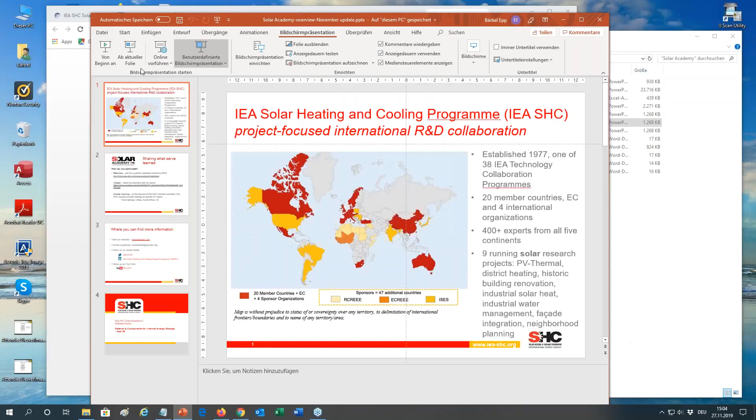Now, I think I want to show you some slides on the IEA Solar Heating and Cooling Program. If I get the, oh yes, that's it. I hope it's all visible.

Well, the IEA Solar Heating and Cooling Program, which is co-organizer of this webinar, is one of the very established and first IEA technology collaboration programs. We have about 20 country members, the European Commission, and 4 international organizations. That means that more than 400 experts from all 5 continents group, and they work in particular solar research-oriented projects. And I name some of these topics. This is a wide range. We work on PV thermal, district heating, historic buildings, industrial solar heat, industrial water management, facade integration, and neighborhood planning. And as we will hear today, about thermal storage material development.

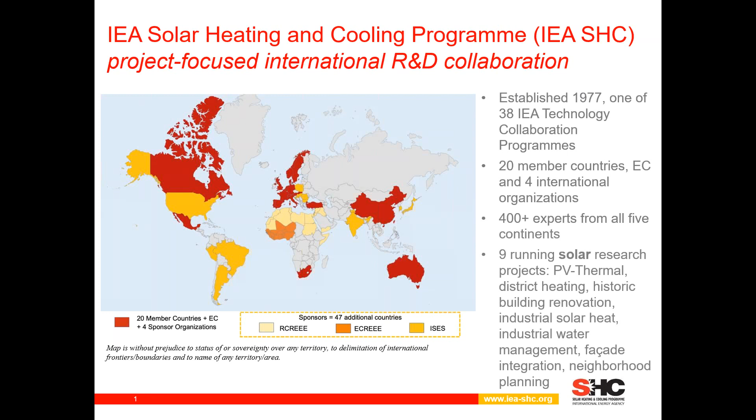We have a webinar today, as I already said, and Jenny said as well, material and components for thermal energy storage. Actually, Task is the word for an international research project within the IEA Solar Heating and Cooling Program.

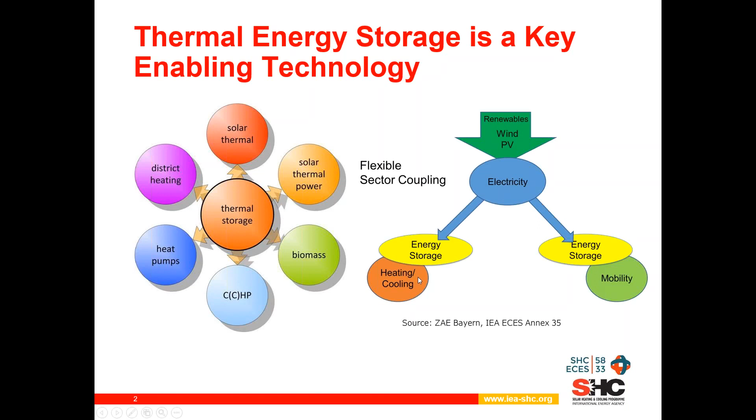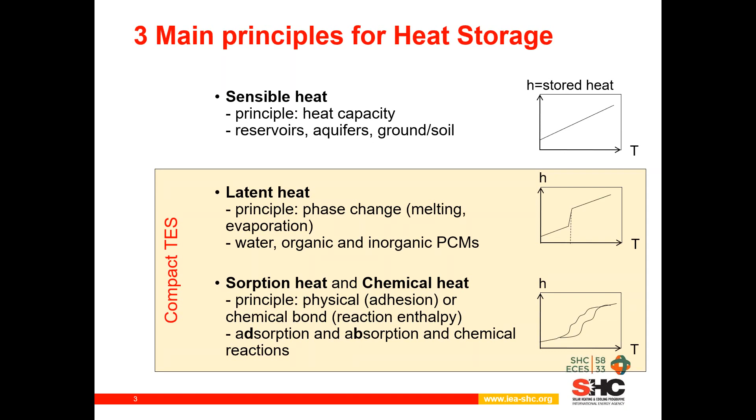In general, these two last classes are being treated and studied in Task 58 Annex 33. We call them the compact thermal energy storage.

What is the purpose of having compact thermal energy storage? The first is that it has a higher storage capacity, meaning you need less volume to store the same amount of heat. This is very important in those areas where volume is very costly.

Another quality, especially for thermochemical materials, is that the losses are minimal, meaning heat can be stored for long periods without virtual losses. This makes them especially attractive for long-term storage.

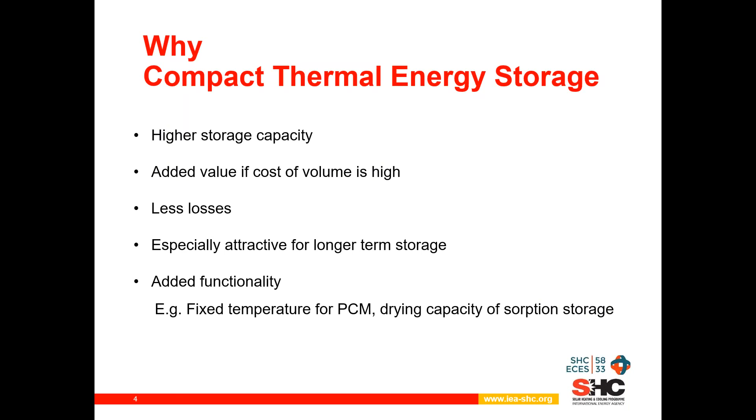Another reason for using compact thermal energy storage is that the materials could have an added functionality. For phase change material, the added functionality is that most of the heat is stored at a certain fixed temperature, meaning those materials can also be used for comfort heating or comfort cooling. For sorption material, moisture is taken up by the material, leading to an added drying functionality.

The challenges in general for thermal energy storage is that it is dependent on the application, meaning that the temperatures at charging and discharging determine which material can be used in which application, next to the charging and discharging powers, for instance. The challenge, therefore, is that there is no direct relation between the material properties, the material data, and how this material will perform in a given application.

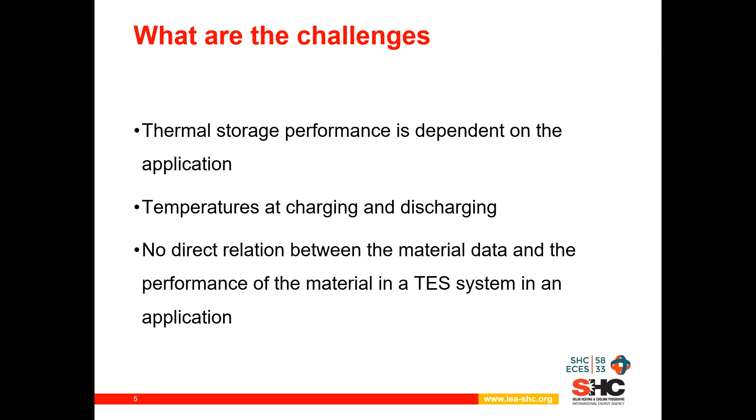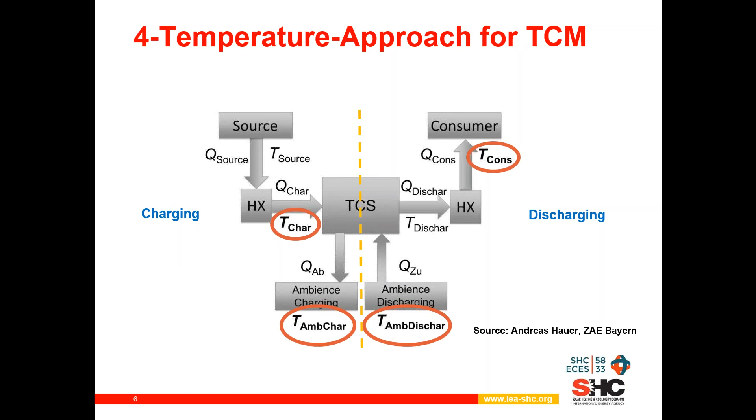But we need another cycle that goes in the other direction: first calculating what the system performance is for this component and material, then going back to the component to see what we can improve. Then we have a component performance, and from this, going back to the material to see if we can change it for a better performing component. This cycle needs to be gone through several times in order to have an optimized system for a given material and component.

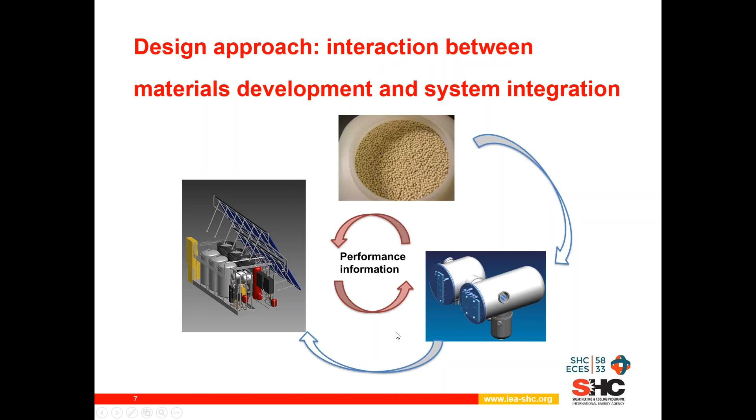And that is what we do in this task. The task is an international collaboration within the International Energy Agency. It's Task 58 because this task is coming from the program Solar Heating and Cooling, and it's Annex 33 because it's coming from the program of energy conservation through energy storage.

We have a 3-year working time, started in 2017 and ending this year. The typical working is that there's a gathering of experts every half year, and these experts are both from the material side and from the application side. So we have a good collaboration between the materials experts and the people knowing how to integrate a storage in a certain application.

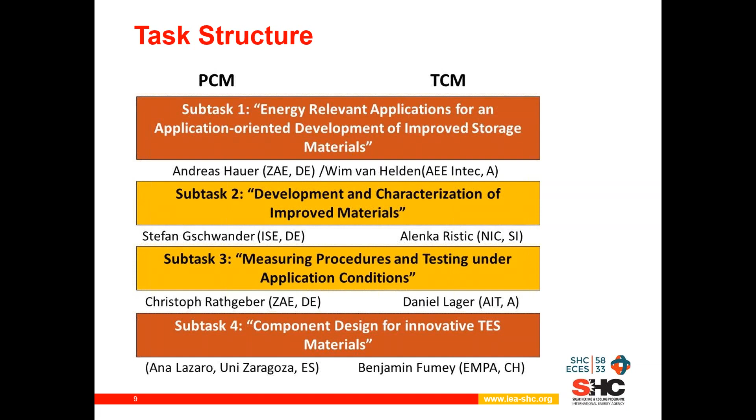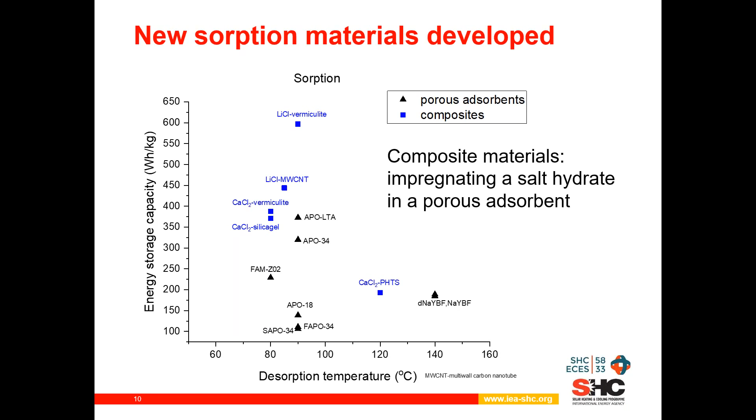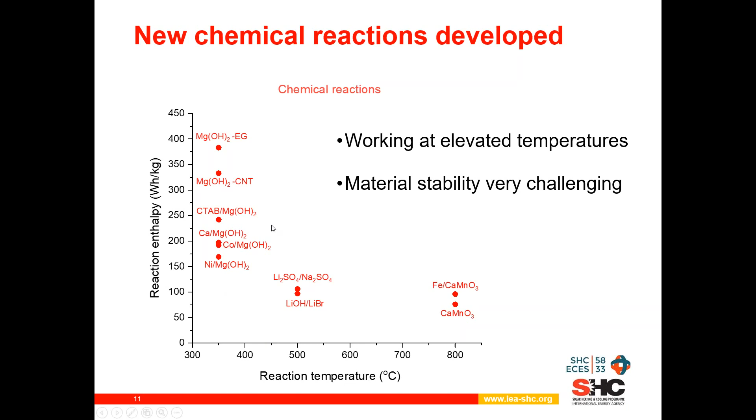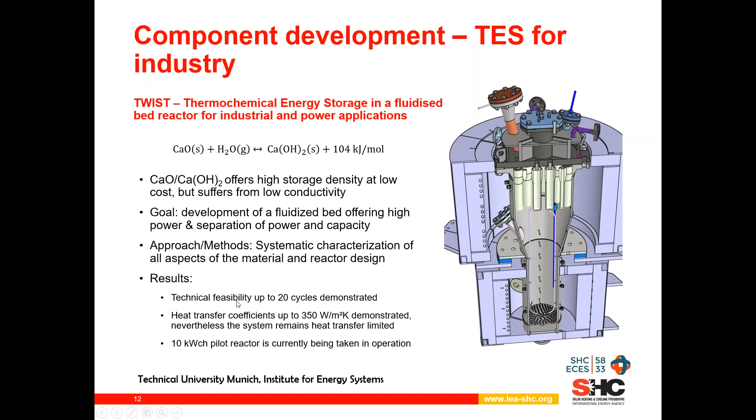The challenge with this reaction is to get the heat out at the proper temperatures and in an effective way, such that all the particles containing this heat are brought into good contact with the walls of the reactor. This reactor is being used for cycling, and up until now the technical feasibility was demonstrated up to 20 cycles.

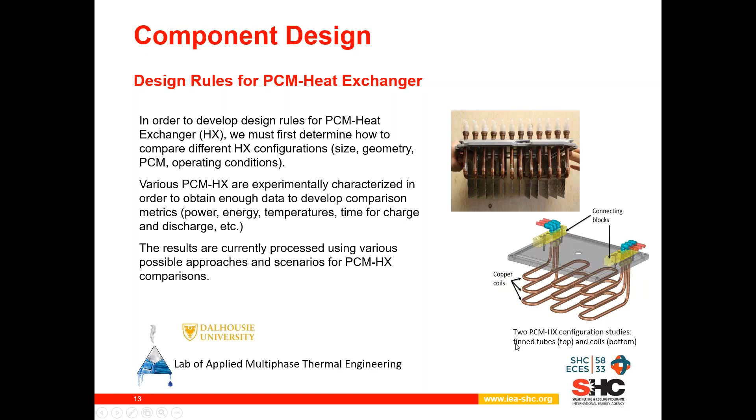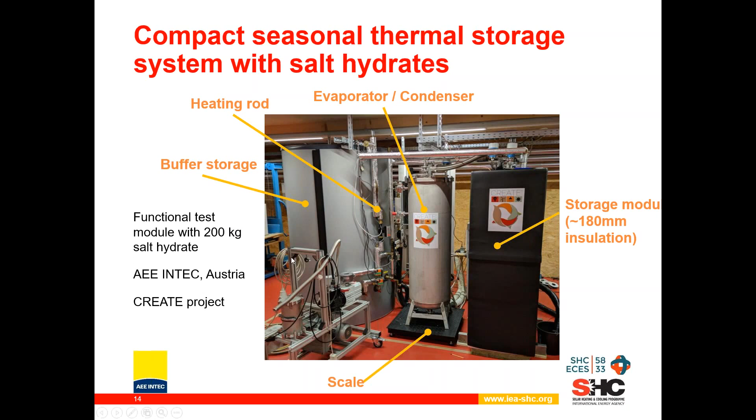The right vessel is the interface between the heating and cooling of the house, and the hot tap water of a house, and the compact thermal energy storage system. We developed this storage module for 200 kilograms of salt hydrate, and now a system of 3 vessels is being demonstrated in a house in Poland.

These were some examples of work that we do. It's impossible to give all examples, because there are more than 40 projects from different groups all over the world working on the different aspects of compact thermal energy storage.

What is the further development need for compact thermal energy storage? What are the things we should work on in future? We saw that there is a need for thermal energy storage to replace fossil fuel supply of heat demand, and to reduce the necessity for large electricity transport capacity in future, because not all energy can be provided by electricity. Therefore, we need thermal energy storage, but it can only be applied if we achieve a cost reduction. This can be achieved by having better materials, better design components, and integrating these components and materials in the best way into a system.

These are the working fields for compact thermal energy storage. We see that the first cost-effective applications will be in the sectors power-to-heat, industrial heat, and in those sectors that have added functionality for compact thermal energy storage.

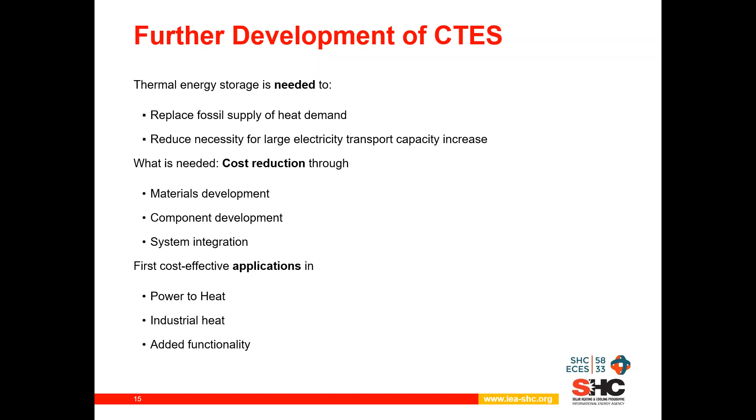So what are the next steps in future to make sure that compact thermal energy storage finds its place in the energy world? We will continue with the design approach, working on materials, components, and systems. We couple compact thermal energy storage research and development to the high potential application areas. We find novel ways for the development processes. We have to formulate new challenges for continued IEA collaboration, not only in our fields, but also perhaps in other fields for system integration and digitalization. And we will address some challenges through mission innovation activities.

And one of them is already starting. It's working on a roadmap for thermal energy storage materials acceleration platforms. And last but not least, what we also need to do is provide decision makers with good information on the potential and the necessary research and development steps for compact thermal energy storage.

This is what I would like to show about this introduction, and I'm happy to answer your questions.

Yeah, thank you, Wim. I think this was a very good interview, overview of a complex research field, really impressive with 30 projects you are managing. And I think this shows already the value of this international research platform, that you exchange and learn from each other and profit from each other's experiences to speed up this important field. So Wim, thank you very much.

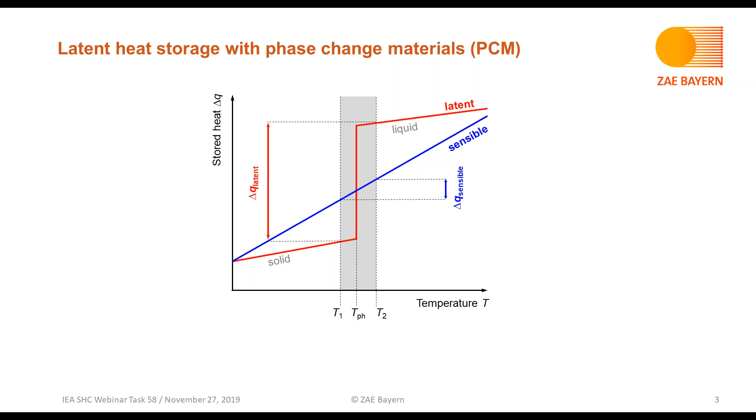Examples of this technology, as Wim already introduced, are ice, the transition from ice to water at 0 degrees C, or what is also very well known, heat packs. They use a salt hydrate with a melting temperature around 58 degrees C. So as you see on the figure, PCM phase change materials provide a high amount of stored heat in a narrow temperature range around their phase change. And that means that each application requires a material with a suitable transition temperature, let's say a suitable melting temperature.

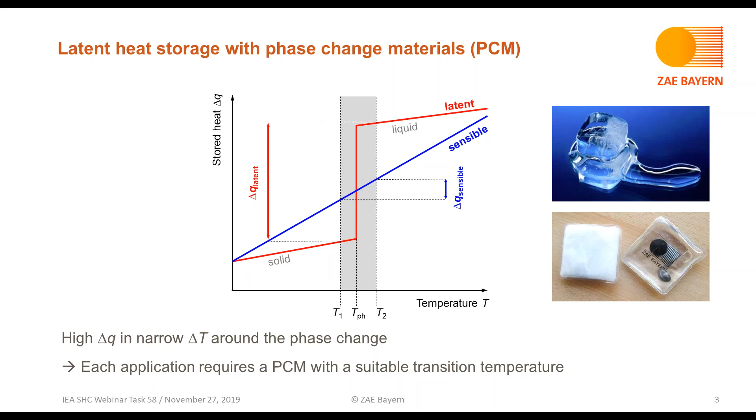For the low temperature range, salt hydrates are most interesting. On the left, you see a figure with the different material classes that are being discussed or applied as PCM, several organic and inorganic materials, and in the range from 0 to 100 degrees, salt hydrates offer higher melting enthalpies in terms of energy density per volume at comparably low costs. An example of a salt hydrate would be calcium chloride hexahydrate - the salt is calcium chloride, and 6 moles of water are coordinated around the salt. However, there are today several temperature ranges without cost-effective PCM, and as pure substances are mostly already known, we are developing salt hydrate mixtures to create new PCM.

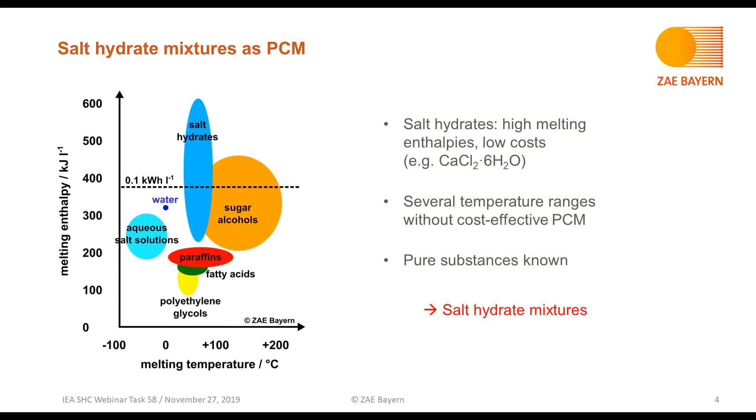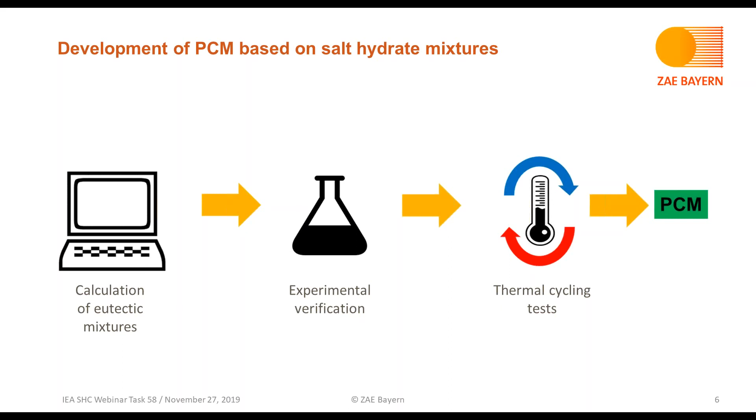So how does it look like to develop salt hydrate mixtures as latent heat storage materials? In our case, we were following this line of development. First, we calculate mixtures to identify eutectic mixtures. I'll show you later why we're doing this. After the calculation, the predicted eutectic composition needs to be experimentally verified. If successful, we perform thermal cycling tests under application conditions. If those tests are also successful, we have developed a new PCM.

So for the first step, the calculation of eutectic mixtures, why are we doing this? Here a simple phase diagram is shown. To keep it simple, the line illustrates the solubility threshold, the transition in temperature between liquid and solid. Above the line everything is a liquid solution, and below, different solid phases precipitate. As marked here in the lithium nitrate and water system, there's a binary eutectic, which is interesting to use as a PCM.

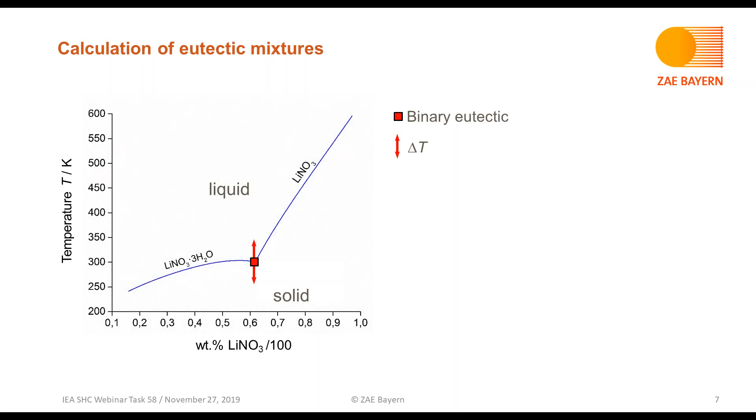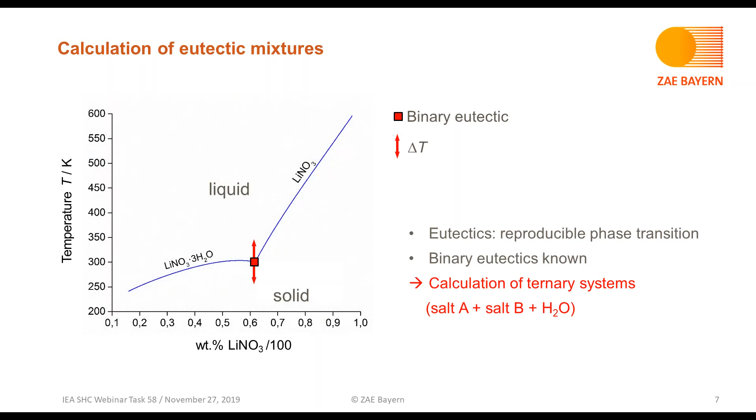If we cycle it or use it in the temperature range shown here, we can expect a reproducible transition from solid to liquid and vice versa, in a short temperature range. So eutectics, in theory, have a reproducible phase transition, and binary eutectics like the example shown are mostly known. Our approach is to calculate ternary systems containing two salts and water.

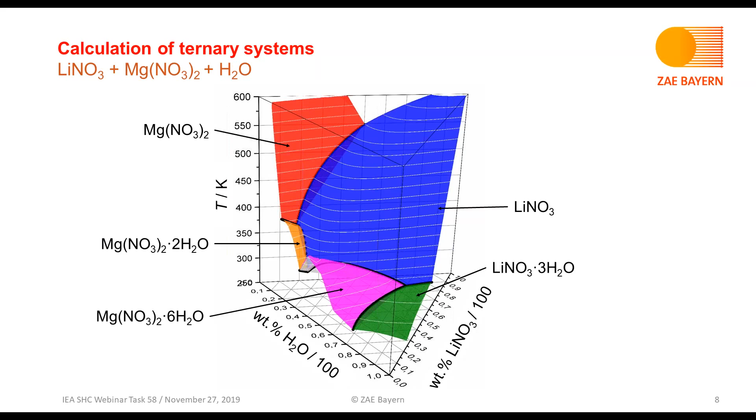In the case of ternary systems, the example given here is lithium nitrate and magnesium nitrate in water. Now we have different liquidus surfaces in this diagram. The base of the diagram is the composition triangle, and in the vertical direction the temperature is plotted. Here are the different solid phases that occur in the system, the two anhydrates and then several salt hydrates. What's interesting for PCM development is the location of the ternary eutectics.

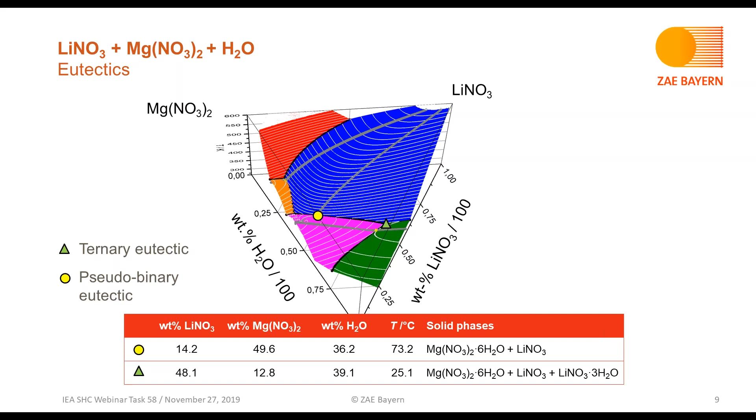Having calculated and predicted these eutectic compositions, it's important to experimentally verify the calculations. First, it's important to determine the concentration of the salt solutions we are measuring. We determine the water content using either a moisture analyzer or titration. A different type of titration is also used to measure the concentration of different salt ions.

Having verified that we are measuring what we want to measure, having verified the concentration of the salt solution, we perform calorimetry.

So now the presentation stopped. I don't know why. Let me check this. Okay, I think I started again from this slide.

Okay, so now we can go on. The second step is to perform calorimetric measurements. We're using DSC, differential scanning calorimetry.

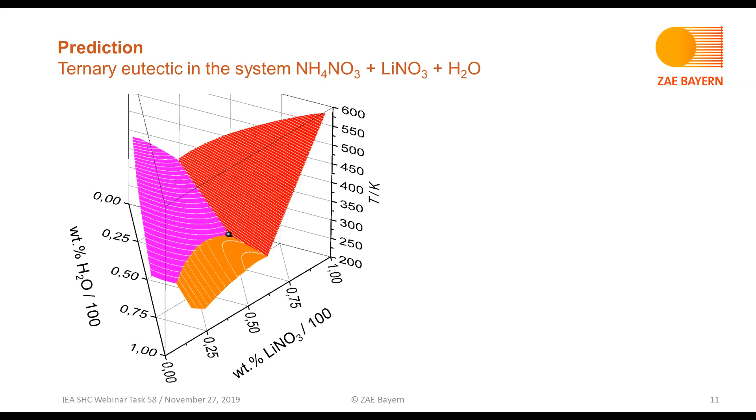To explain it a bit more in detail, I'll give you a brief and simple example. Here's the ternary system containing ammonium nitrate, lithium nitrate, and water. Shown on the left is the phase diagram, with the three solid phases that occur here, and indicated as a black ball is the location of the ternary eutectic. In the calculation step, the information we get is the three phases in equilibrium with the salt solution, their composition, the eutectic composition, and the eutectic temperature as indicated here.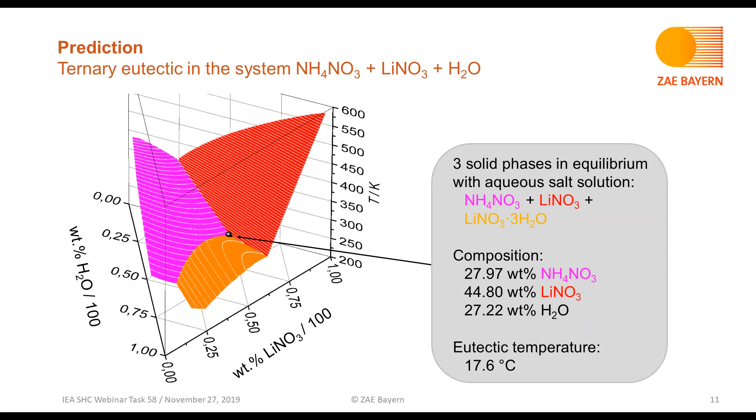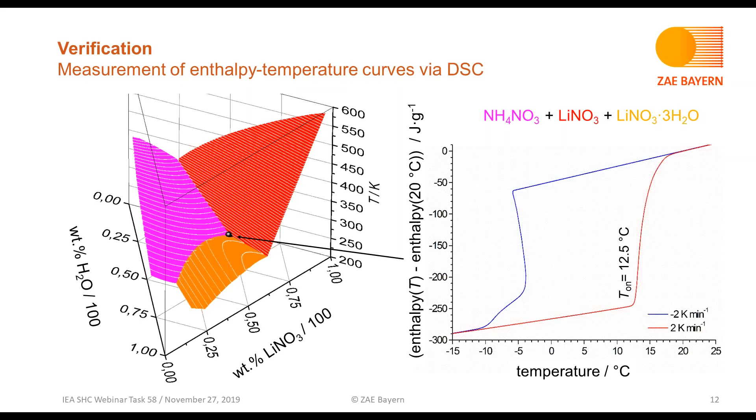Now we perform calorimetric measurements, DSC measurements, with the sample of that composition. This is an example of a successful verification, because what we observe is a single and quite narrow melting transition, shown by the red curve. Blue is upon cooling, red is upon heating. So this eutectic is experimentally verified.

The next step is to perform thermal cycling tests. The idea is to validate that the PCM can be used over many heating, cooling, melting, and crystallization cycles, taking into account the requirements and conditions of the applications.

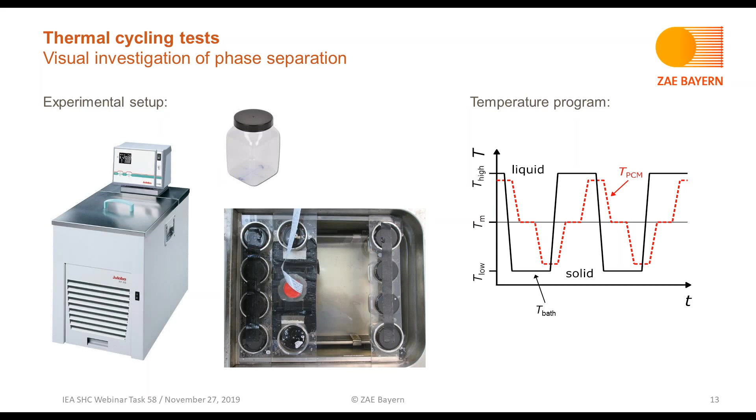So what we do in thermal cycling is shown on the right, the temperature program. We have the PCM subjected to repeated heating and cooling. What we found to be very important and useful is a visual investigation of phase separation. So we measure the eutectics in transparent bottles, put them in a thermostatic bath, and take pictures during the thermal cycles, as shown on this slide.

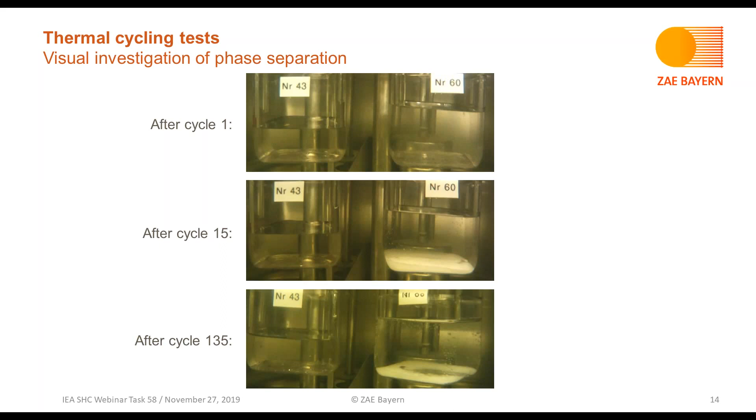Now I'd like to show you a possible application of salt hydrates in the context of low temperature latent heat storage. The application is a system providing solar heating and cooling with the combination of an absorption chiller and the latent heat storage. So how does it work?

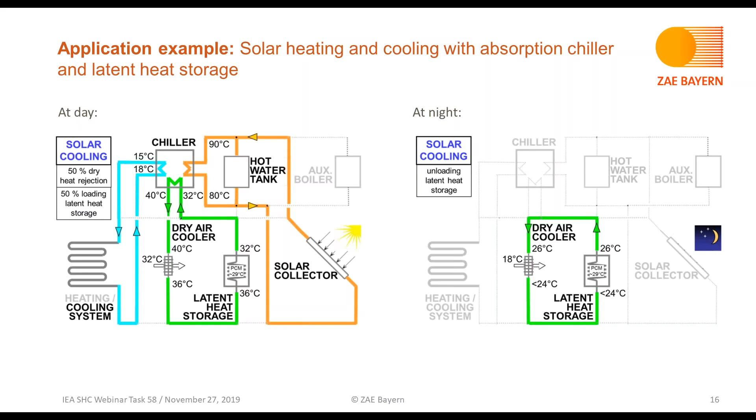For this system, we were using calcium chloride hexahydrate with a melting temperature of 29 degrees C, which suits well to the application temperatures.

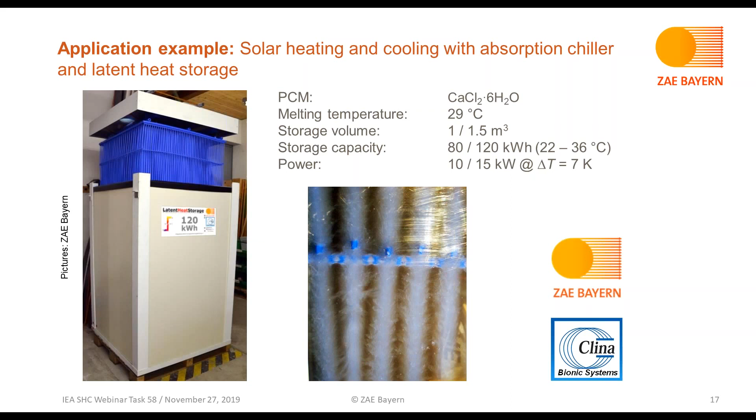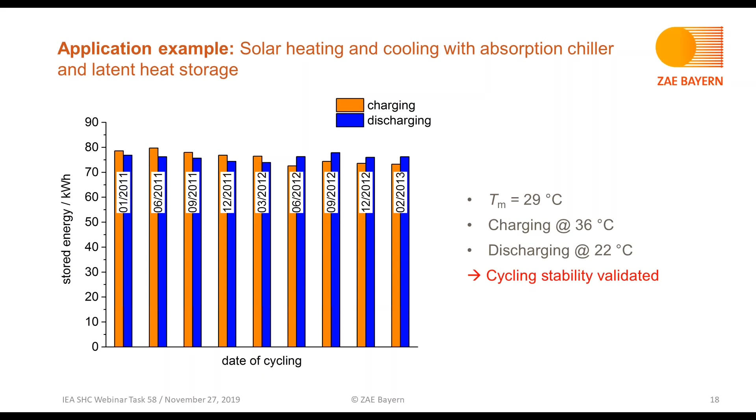With this system, it has been in operation for several years, and here you see the results of the thermal cycling at storage level, again applying a charging temperature of 36 and a discharging temperature of 22 degrees C. Thereby we could validate the thermal cycling stability for this material in this storage configuration.

Now I'd like to come to the summary of this presentation. Material development of low temperature latent heat storage has been carried out in several steps. The first is to develop PCM based on salt hydrate mixtures. This is done by calculating solid liquid phase diagrams to identify eutectic mixtures, and then experimentally verifying the predicted compositions using calorimetry.

The second step would be to perform thermal cycling tests in order to check the long-term performance of these materials. As you have seen, it is very useful to visually investigate the phase transition, and thereby being able to investigate possible phase separation processes.

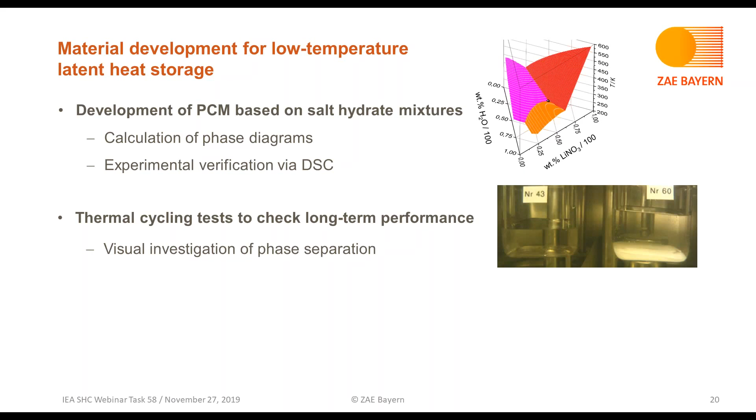In the end, this material development can be transferred to the concept of low temperature latent heat storage using an immersed capillary tube heat exchanger. Also at this storage level, it's important to perform testing under application conditions to ensure the long-term performance of these materials.

We're going to look at some of the activities we did in subtask 4, components and system development, and I'll use the work we're doing on liquid sorption heat storage as an example.

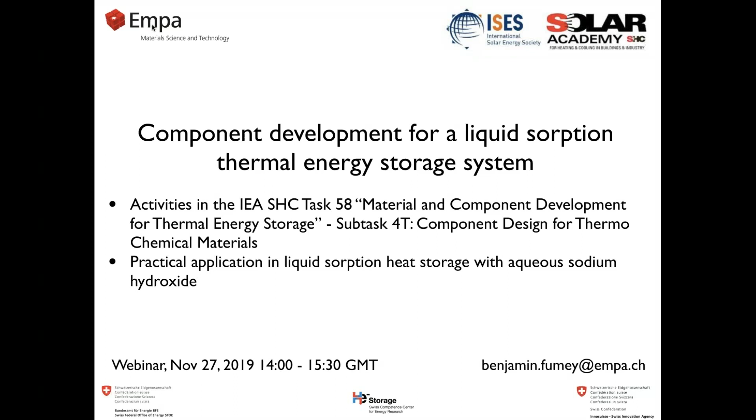As Wim had already mentioned, we've got a whole lot of different demonstrator lab-scale systems being reported, with all sorts of different processes, power, capacity, and applications found. One of the main challenges is really the heat and mass exchangers for these sorption heat storage systems.

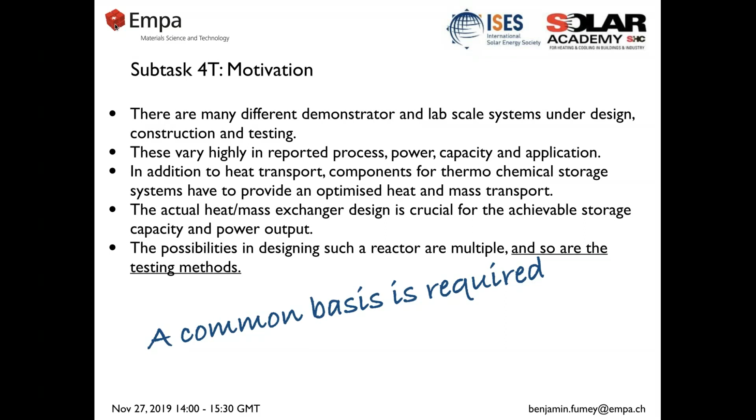What we've understood is that we need a common basis to make a comparison of these systems and to understand progress in the field. So in our subtask, we've found two basic evaluation levels, which we see here: the 4 performance criteria. One we call gross temperature lift, then volumetric energy density, power density, and finally round trip efficiency.

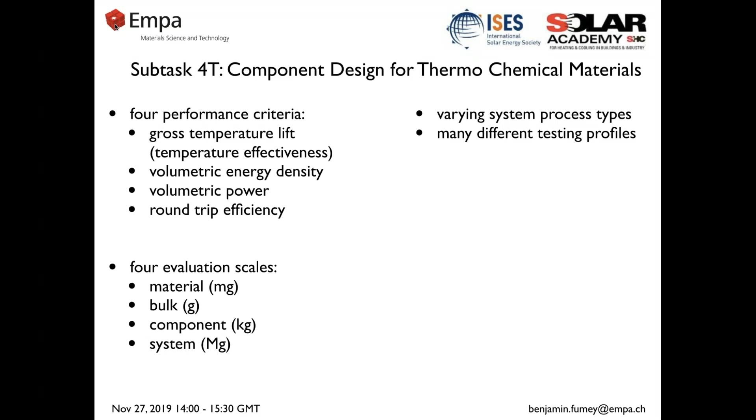We can do this evaluation on 4 basic different levels: material, bulk, component, and system. We also see varying process types and many different testing profiles being used. So to get a common basis for comparison, we need to first define some realistic temperatures, and we've looked into what those realistic temperatures are.

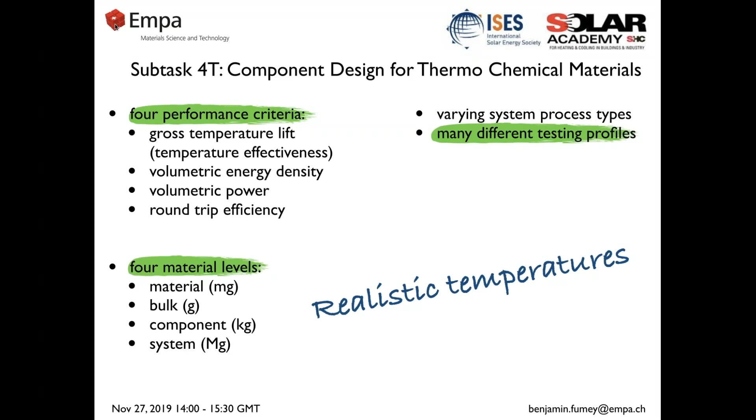What I'll show now is part of a temperature definition we have made for a building application. As we know, sorption heat storage works as a chemical heat pump, and temperatures very strongly affect the performance of the material, the component, and finally the system.

Without going much further into these temperatures, as Wim had pointed out, we need charging temperatures, we need ambient temperatures for a heat sink, we need source temperatures in discharging, and in this case here we need a certain space heating temperature.

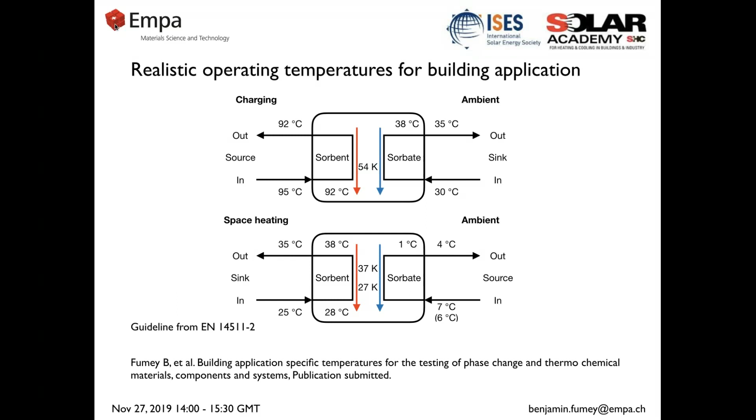With defining these temperatures, it is possible to evaluate right from the materials, at the milligram level, to the system performance of material, component, and system. So this is one of the very important initial common grounds that we have defined now for building applications.

We see we've got all sorts of varying systems, and looking into this, the question is whether it's possible to define basic processes of these different systems, to look into the basic processes, and even find some of the possible performance reductions going from material to the system level.

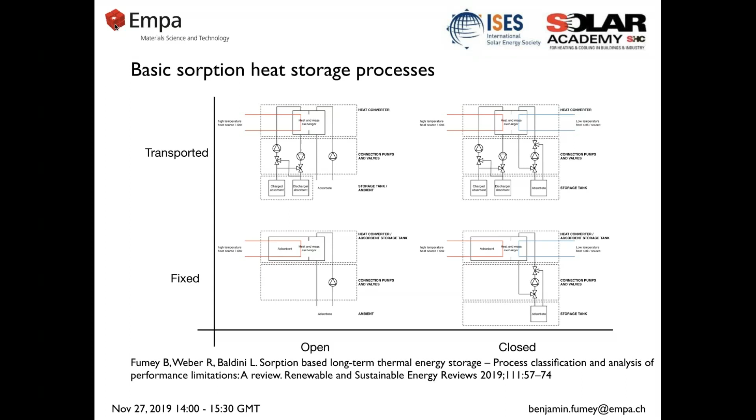So we have four basic storage processes that we've defined, with further details in the publication mentioned below. A brief point here is that the closed transported system has some benefits over the others, with closed having a higher vapor pressure and thus better discharging performance, and transported being able to cool down the absorbent further, especially with a counterflow process between the heat transport fluid and the sorbent, thus discharging better. So the choice of system process does have an effect on material performance.

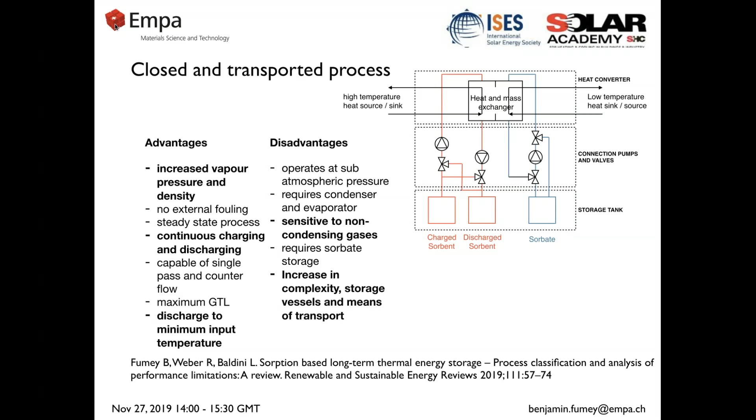Going on now with the temperature profiles we have defined, we can on a material level evaluate the maximum performance of such a material, and it's very important. I show this here now for sodium hydroxide.

We have the water vapor pressure on the y-axis, temperature of the aqueous sodium hydroxide on the x-axis, and depending on what temperatures I work with, I get different performance in respect to the gross temperature lift required for charging, the upper line, and the gross temperature lift I'm able to reach in discharging, and importantly in discharging, the minimum concentration I get, which then defines my maximum energy density.

Here, just to point out, you see the red dashed line indicating that in our case with sodium hydroxide, we do not want to go beyond 50%, because we have a liquid sorption system, and sodium hydroxide tends to crystallize above 50% at room temperature.

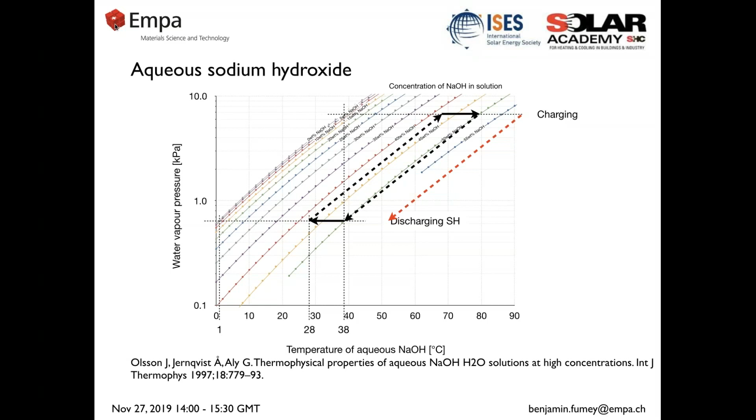So we already see here now with these defined temperatures, we see we have a slight limitation in our case with sodium hydroxide in the application. Another method to present this, which is a sort of mapping, is nice to start with a theoretical performance.

And then also place into this diagram the performance of components and systems, which is what we see here. We have on the x-axis the gross temperature lift, which means the temperature difference between the desorber and the condenser in the charging process, and the evaporator and the absorber in the discharging process. On the y-axis, we have the mass fraction or concentration, in our case, of the sodium hydroxide.

And the blue line is the vapor pressure line, here in our case at an evaporating temperature of 4 degrees. Absorption is always going to be above the line, and desorption is going to be below the line.

And very important for heat storage here is we want to be able to perform close to this equilibrium line. You also see that in this desorption, the practical gross temperature lift is always going to be slightly greater than equilibrium. In the absorption, it's going to be less, and here we already can point to a loss in the gross temperature lift, or if we define it as the temperature effectiveness, would be the gross temperature lift in absorption divided by gross temperature lift in desorption.

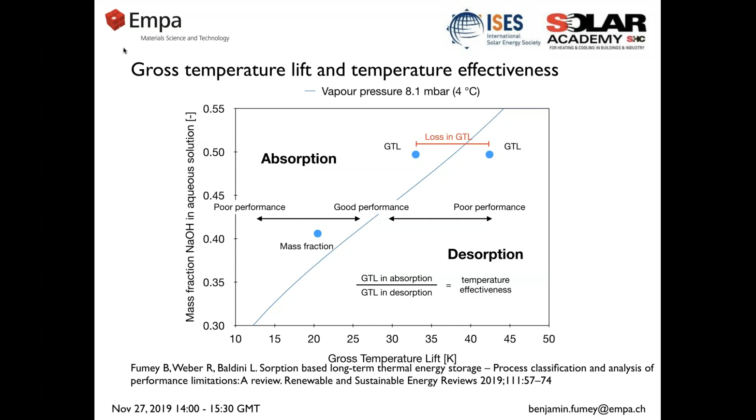This is also further alluded to in the below mentioned publication.

When we look at the vapor pressure equilibrium lines as stated based on the temperatures that we define, we see here that because in the charging we have a higher condensation temperature than in the discharging evaporator temperature, we of course have a gross temperature loss just due to the specific application.

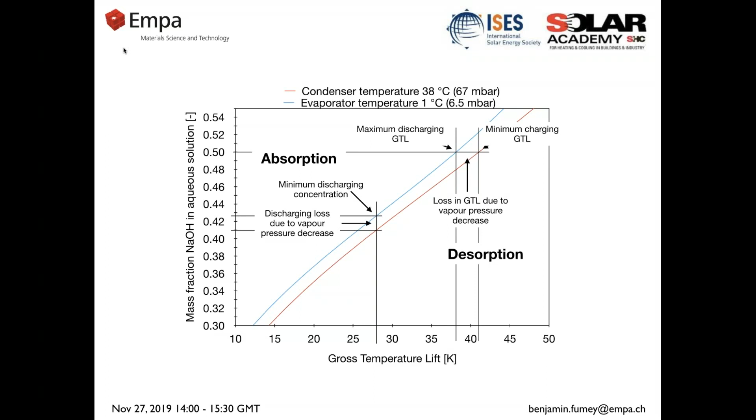And also, more importantly, what we see here is that in the discharging, because of the low vapor pressure, we cannot discharge to the same final mass fraction as would be possible with higher evaporating temperature. So just pointing to the fact that it's very important to have a common basis on the temperatures that we work with.

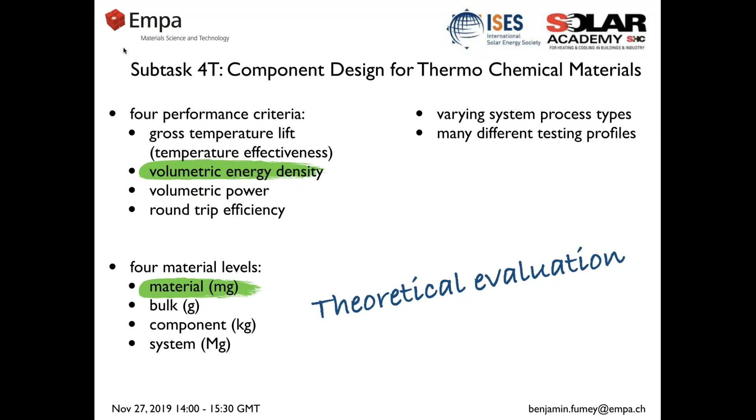Now, if we go to have a look still in the theoretical evaluation on the volumetric energy density, it's very important to base this on the maximum volume of the storage material. This is done here in this diagram for sodium hydroxide, starting at 50%, and then depending on how much we can dilute it, we have a respective theoretical energy density.

I've drawn in two lines here, just pointing to the fact that due to the application and the different vapor pressures in charging and discharging, we see that because we have lower vapor pressure in discharging, we could reach a lower energy density. In this case, the 162 kilowatt hours per cubic meter compared to the 190.

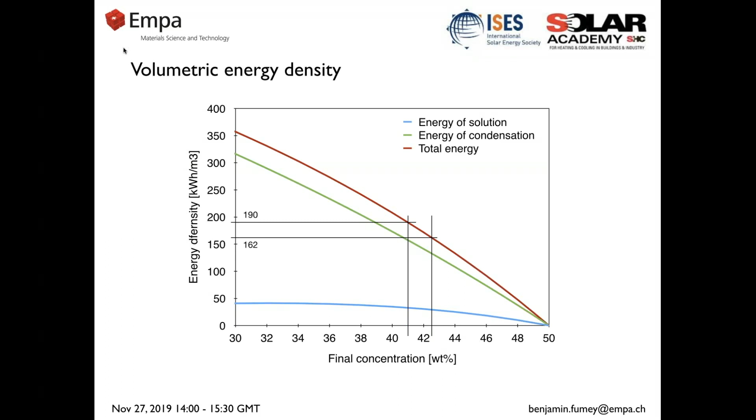One more time, this is in respect to the maximum volume, which in our case would be the charged, so separated sodium hydroxide from the evaporating water.

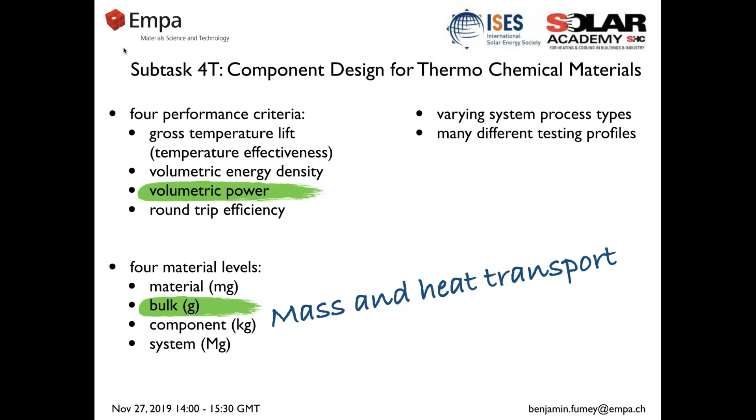Now, going into volumetric power, evaluation on the material level is not really possible here because it has a lot to do with components. But there is, on the bulk scale, so on the gram scale, evaluation possibilities to see behavior.

We have built a sort of bulk level heat and mass exchanger device that I show here: a large evaporator condenser on the left side and an absorber desorber on the right side, connected with a flexible stainless steel tube. What we do here is measure the mass uptake of a thin film, in this case of sodium hydroxide, in the absorber desorber.

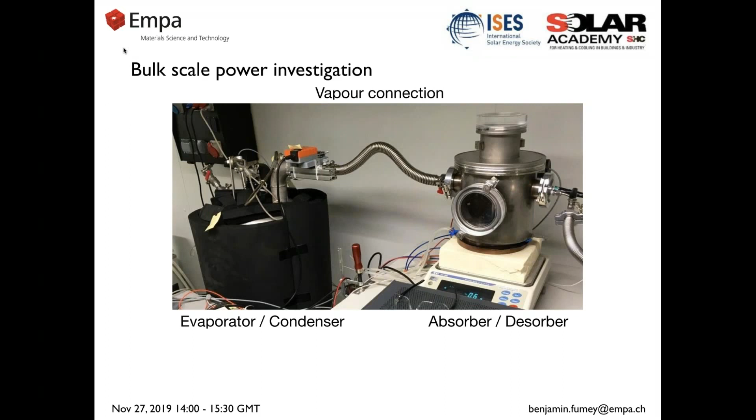You can imagine it was quite challenging to actually get the scale to only measure the mass uptake and not also all sorts of effects due to the connections involved. But from this evaluation, I can show here one measurement where we have an idea of the power performance of this thin film of sodium hydroxide.

The purple is the mass uptake, and then in orange, gray and green is the power. We see that once starting absorption here, so we started with concentrated sodium hydroxide, 58%, we have a tremendous power peak at first.

In our case here, we have about 36 watts at first, but a very rapid decline of the power as the mass, or water vapor, is absorbed and the concentration reduces. After 30 minutes, we have only about 5 watts, but we have not reached the equilibrium state of our sodium hydroxide.

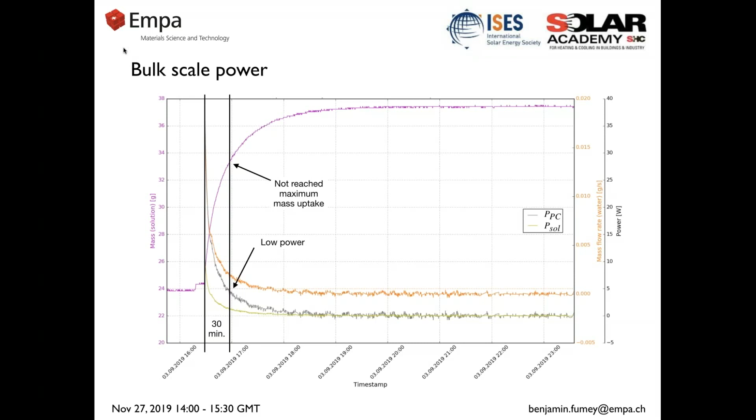This points to the fact that for heat storage, where it's very important to be close to the equilibrium line to reach high energy density, we're going to have a heat and mass exchanger that is not power optimized, but needs to take into account the low power in the process of moving towards an equilibrium state of the concentration of the sorbent to the vapor pressure.

Now, with this in mind, going to component design, in our liquid absorption heat storage, we find that this is a similar process as for example a chiller or also a heat pump, absorption heat pump. Nevertheless, with including the storage of concentrated sorbent and sorbate in charged state, and then discharged state storing of the diluted sorbent for recharging.

We have a process where we need to be able to reach this maximum discharging in a single pass of the sorbent through the heat and mass exchanger. For this reason, we find for the liquid sorbents the tube bundle falling film heat and mass exchanger, as used for chillers and for heat pumps, is not ideal.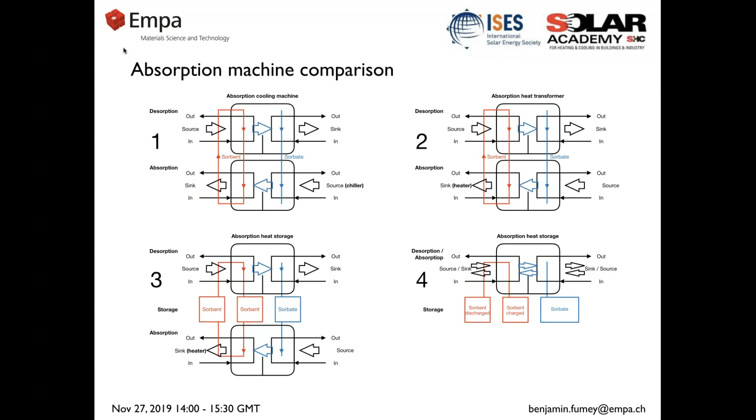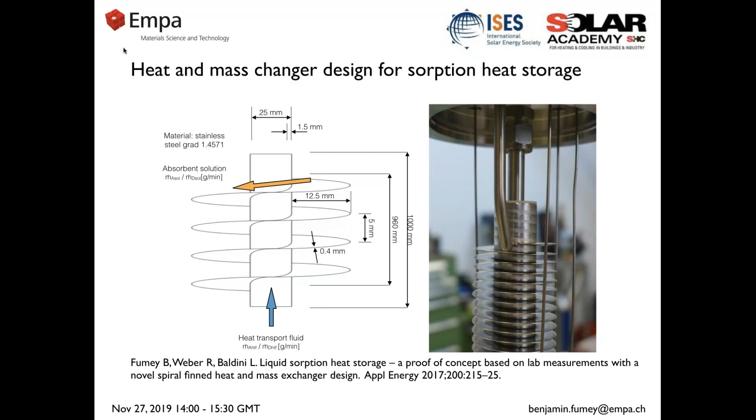And we've done numerous tests with this. For example, we have an exposure time of the sodium hydroxide of about 12 minutes in a nice counterflow, so we're able to cool down the sorbent right to the input fluid temperature and reach a continuous process and reach a maximum temperature gain, gross temperature lift, because there's always fresh sodium hydroxide introduced to the top of the spiral fin. And we've tested this now in a lab scale setup with a single tube, as shown here.

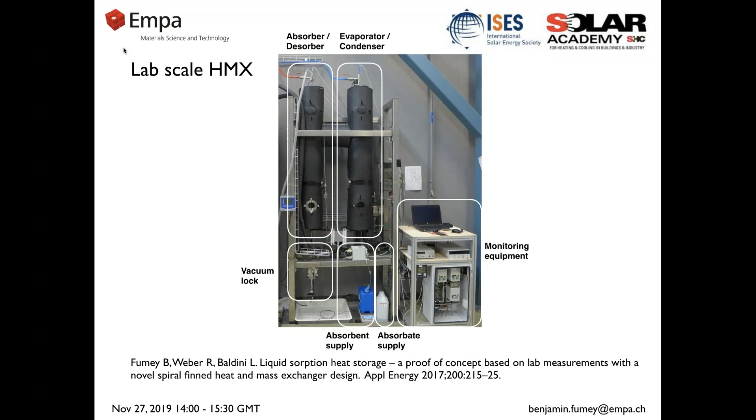On one side, the absorber, desorber, a similar build, the evaporator, condenser, and here are now some of the performance results we reached with our setup, again shown in this gross temperature lift and mass fraction mapping. And the red here is the equilibrium line at 20 degrees.

I show this equilibrium line because these tests were done at a condensing and evaporating temperature of 20 degrees, which, as we saw previously from the realistic temperatures, is of course not quite fitting.

But nevertheless, as an example here, we can show that depending, for example, on the mass flow, so how much sodium hydroxide flows in grams per minute on the heat mass exchanger, we see that we're closer or not so close to the equilibrium line. Here on the left bottom is a discharged state, and it is seen that even though mass flow is increased, 11 grams per minute compared to 2.3 grams per minute, the power is substantially increased, but we divert away from the equilibrium line.

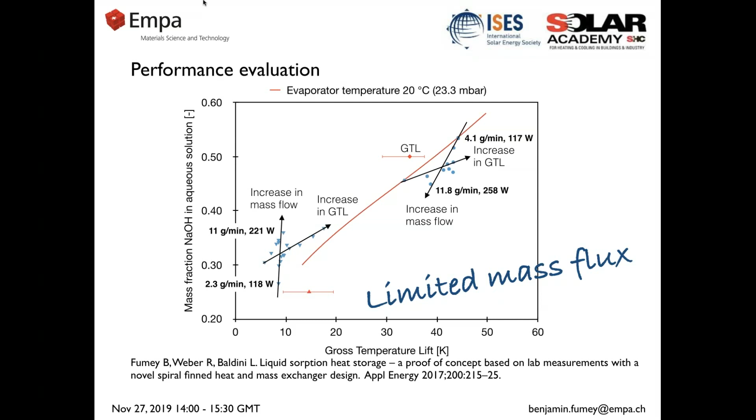So to conclude here, in the task we've been able to define the 4 basic processes and evaluate these, and show that on the process level there are benefits of some processes over the others.

We've been able to define for building heating storage applications testing temperatures, which enable evaluating performance of material from material level to component and system level, and also comparison of different materials and different systems is made possible as far as these temperature profiles are abided to.

And emphasis on the fact that absorption heat storage is a similar process to sorption chilling and absorption heat pumps, but in the sense that we need to be close to the equilibrium line because of the energy density, which in a chiller or absorption heat pump is not a major focus, or not a focus at all. For this reason, we need to be aware that often heat storage systems will require different types of heat and mass exchangers than the chiller and heat pump.

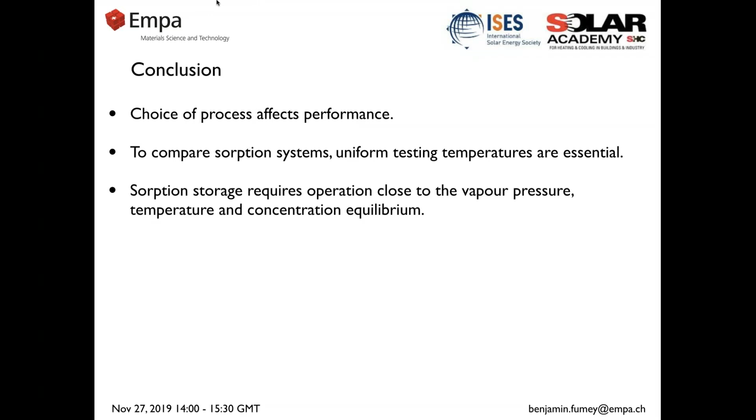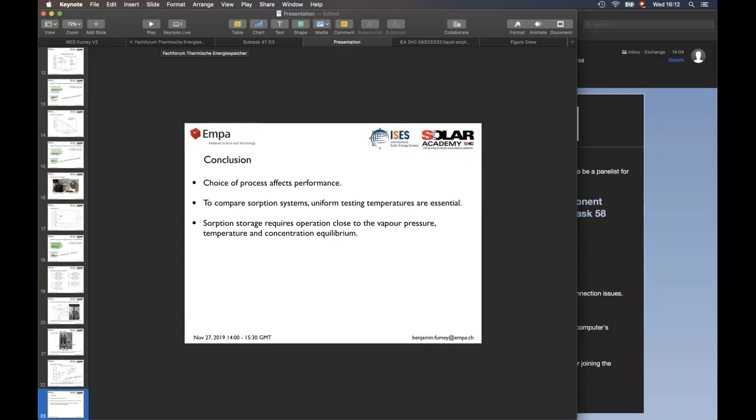I would like to start with more general questions. Wim, we had a speaker interested in whether there's research going on to find compact storage materials that can work both in heating and cooling modes, meaning that if you have a certain period where you need cooling, you can switch over to having a hot water period, or whatever, in the other part of the year.

Thank you, that's a very good question. I do not immediately know of research going on in this field, because it would really need to be a material that is switchable. It has been discussed a few years ago to work on this possibility, but I'm not aware of a group now at the moment working on that.

So another task for your new research group. Yeah, possibly. It's very interesting.

And then regarding other PCMs, phase change materials, I think there are a number of questions for Christoph. First, a general one: somebody asked for a PCM material recommendable for the temperature range from 22 to 30 degrees.

One of the materials I already showed in my presentation is calcium chloride hexahydrate, melting at 29 degrees C. As this is a very favorable material regarding cost and energy density in this temperature range, either using calcium chloride hexahydrate itself at 29 degrees, or preparing mixtures with it as one of the components, would be an option.